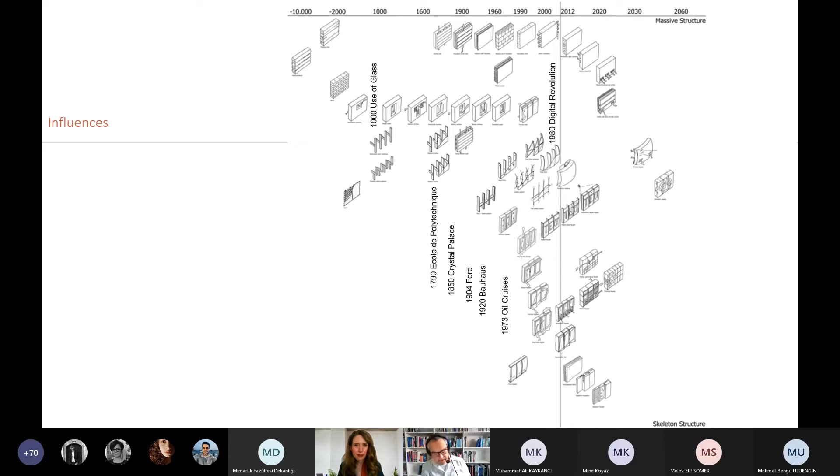And I identified some parameters from my environment, which I believe were intensive impacts on our development. So the oil crisis of 72, 73 was something which brought our Western European environment to this point: we need to do something about energy, which brought an intensive development in, for example, insulating glass facades becoming better. These aspects are interesting to see.

And then it's interesting to see that you can identify bubbles of people developing certain things. It starts with this first generation glass. It's the 1840s glass bubble, with Paxton, which we all know from Crystal Palace, as one of the people moving the, at that time, very rural structural glass engineering towards a more industrialized structural glass engineering, not really being able at that time to identify the structural performances of the material.

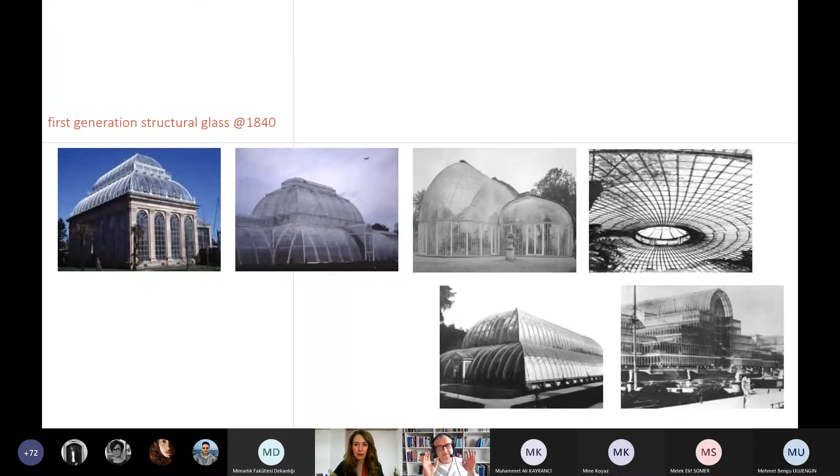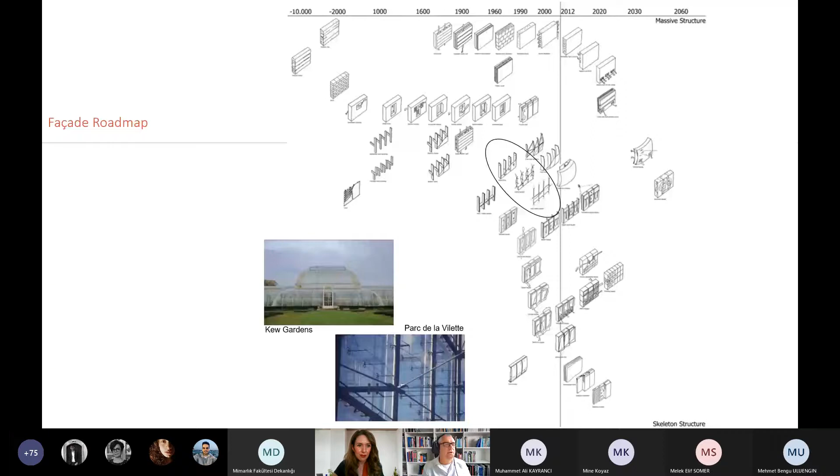Super interesting to see. When we continue with this line, I tick the next box. It's the 1980s, 1990s structural use of glass, where we see all these first large superstructures in glass, all the glass fins, first spiders developed by Peter Rice.

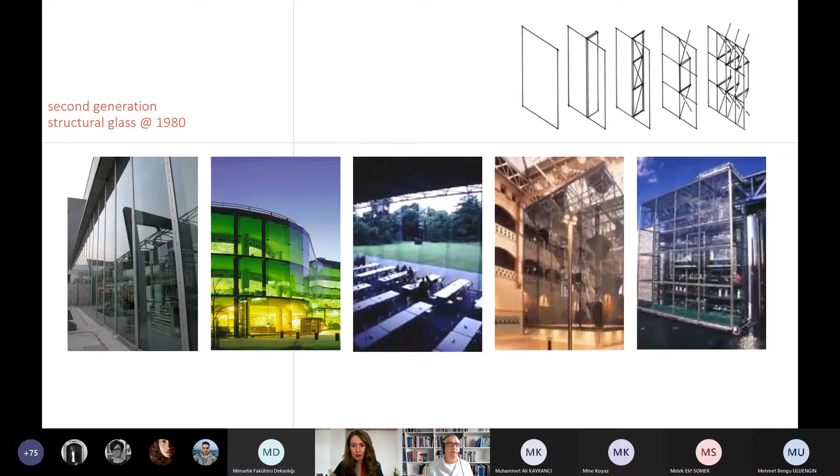1980s, which brought us to this opportunity to create large, fully transparent, as we named it at that time, fully transparent glass structures. Again, a bubble of people, and we are currently in this situation of, as I define it, a third generation of structural use of glass, where we see the Apple stores, Rob Nijsse doing his folded glass pieces.

This one piece of, say, a deformed glass structure, the second picture at the left side, or the super solid glass bricks, which are on the super right side. Again, it's a bunch of, what, 10 people engineering this worldwide, which is then widely used in architecture, but the key people really being able to engineer, that's a limited number of people.

Really interesting to see, and also to see how they interact with each other, how they even sometimes bitch with each other. And then this energy crisis, as I named it,

which gave us this impact of we need to do something with the insulation level of our glass structures, which starts with the boxed window far left as a window with 2 layers of single layered glass or non-insulated glass, IGUs, insulated glass units, developed towards all the double facades, which we then saw till, let's say, 2010 as a development,

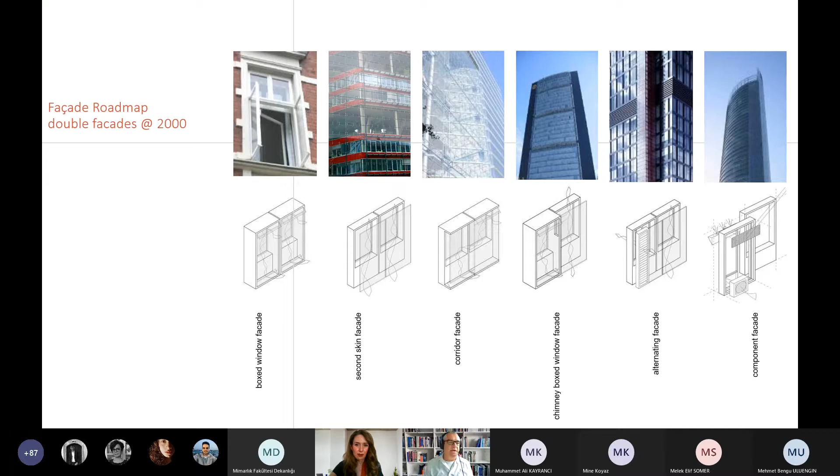and out of this understanding of the change of the building envelope, not only being the building envelope for rain protection and heat, but also becoming a part of the climate design of a building by also integrating building service units. This brought us to this next level of interaction, which is still an ongoing development of integrating service components, the HVAC system, the heating and cooling system, into the glass building envelopes.

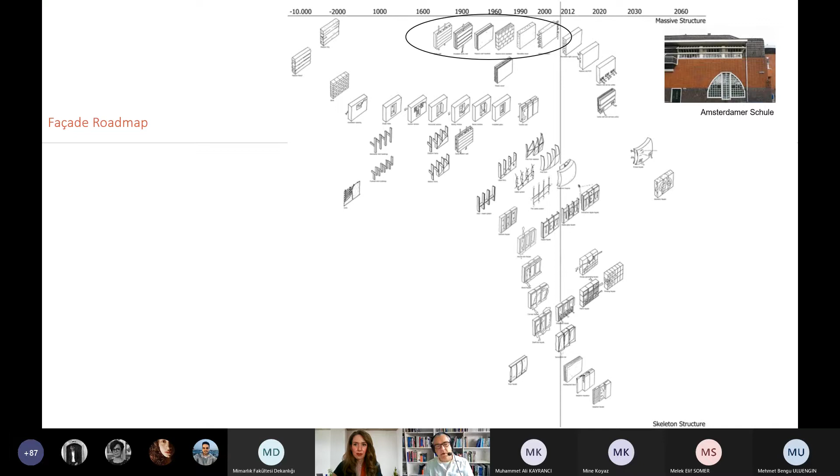And that's what this picture sketches, that some of these super high-end double glass facades are now ending with service units being integrated. This continues in more opaque structures when we sketch the technology of facades, from solid brick facades to cavity systems to load-bearing light concrete, light brick structures, adding the opportunities of service components into these, which we see in these first early sketches.

The current technology developing, in my Western European environment, is moving these opaque facades toward energy gaining facade systems. I'm going to talk more about that later in this lecture, but I wanted to make the broader picture out of this one. Again, this is a bubble of 20, 30 people really engineering it to bring it to a technical level, which now delivers a certain energy impact.

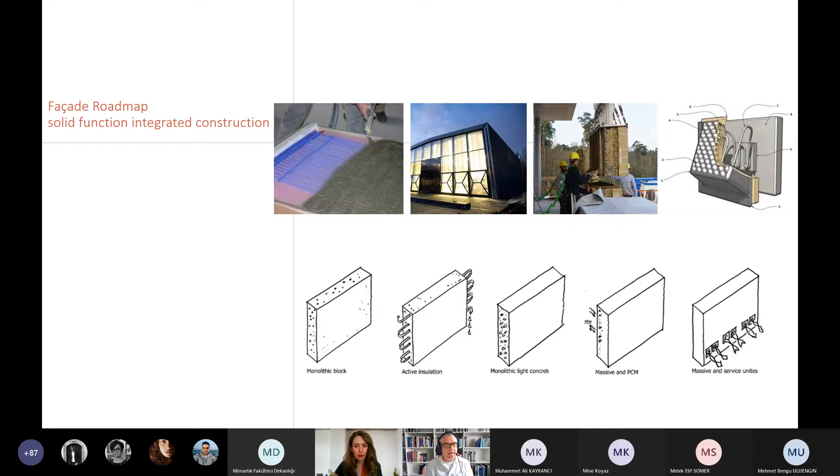That's going to be chapter 1 of this talk, and then there's chapter 2, which is about 3D printing, which is, from my point of view, super interesting as well. Again, randomly picked pictures out of my environment, expressing that there's a development which we clearly see with all the different materials which we can print: the polymers, the plastics, which we are used to, the metal, which is developing, the concrete, which we see a lot on Facebook and Instagram, the ceramic, more rarely, glass, very, very few, wood and paper, nearly none.

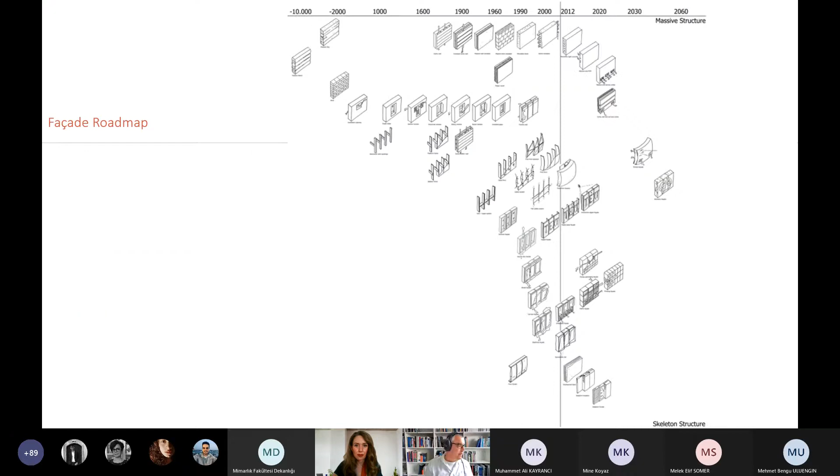And that's going to be the second chapter of this lecture, expressing the printing technologies and what we can do with that in our construction environment. So this is a roadmap to start with, and I jump to this chapter, this area of service integration into the building envelope. We are aware of light concrete being good for load bearing, but also for insulation, with the disadvantage of reducing the thermal mass, which may be an aspect to discuss.

It all started, or kind of started, with this design school project in Essen. The design school is in a university building, which was designed by Sanaa. And they collaborated with Matthias Schuler, Transsolar, a very prominent climate design company in Germany, and Holger Techen, a very prominent structural designer at Bollinger & Grohmann in Frankfurt.

And they were asked by the architect, can you please design a single concrete wall, no insulation, so kind of impossible in Western Europe, just a concrete wall, Tadao Ando like, as the quote. And the engineers started working with that and came obviously with the solution. Now we either insulate at the inside, or at the outside, or somewhere in between. But still, the concrete walls are getting larger than the 20 centimeters Sanaa expected at that time.

And at a certain point, Matthias Schuler in person came with this idea of active insulation. Active insulation in this situation means that they harvest hot water from a mining which is below this design school. It has to be said it's an old industrial area with a lot of coal mining.

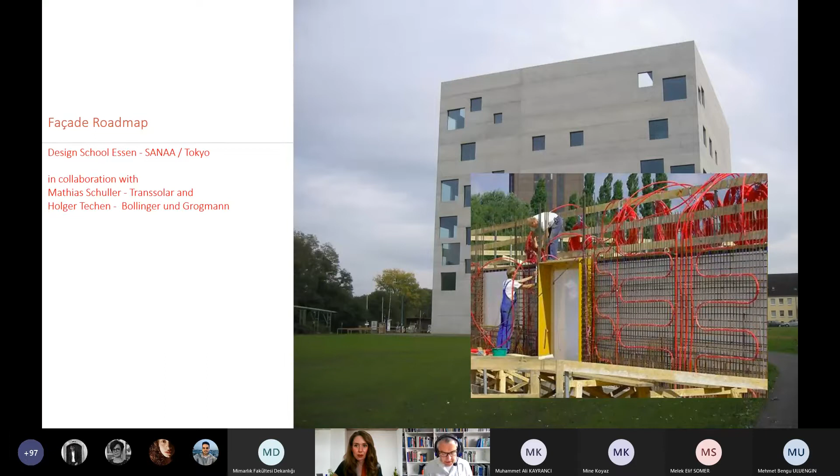Side note, yes, you can argue you could use this energy for different purposes, but in this specific situation, it was decided to use it to heat this building, this entire concrete building, and by that ending up with this super straight and super static concrete surface, which is heated by this groundwater. That's an interesting change to get this opaque structure into a building service component.

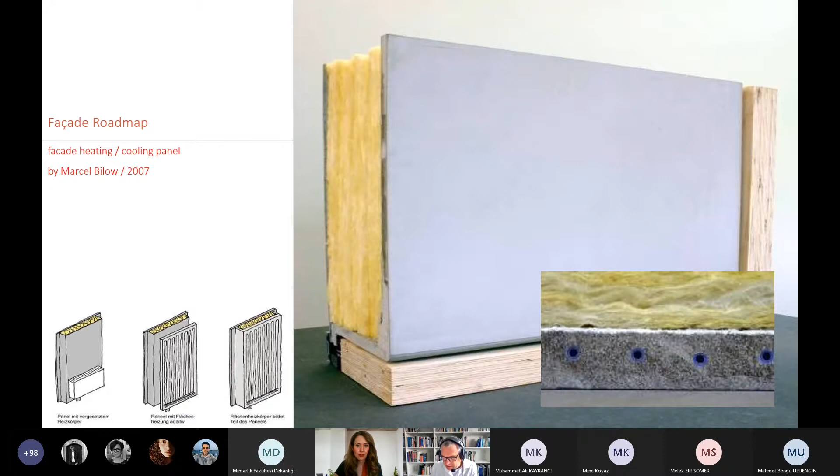This idea was taken into account when Marcel Bilow came with his master thesis, his project in 2007. So you see, it's already a development which you can see in time. He started adding these small capillary pipes, which you see on the far bottom right picture, the blue holes. These are 2 millimeter, 3 millimeter wide capillary plastic pipes being integrated, as we see it here at the top right picture, in a concrete surface, and this concrete surface then being heated or cooled depending on what you wanted to do with it.

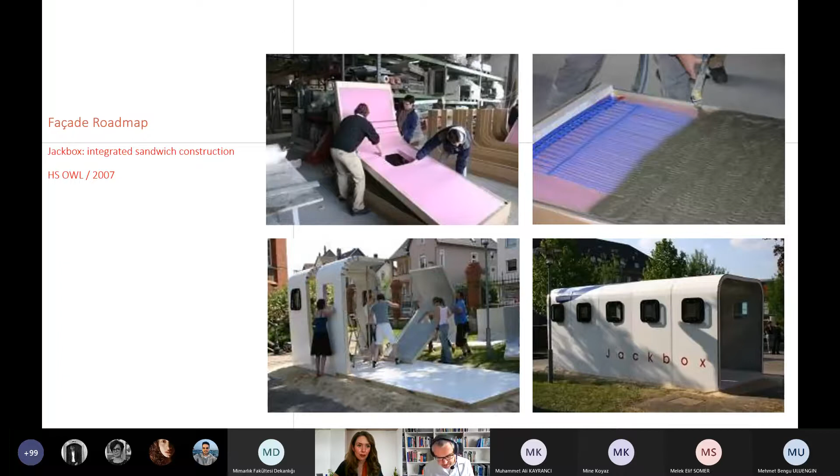This was in the second project which he did, a small pavilion which was built. It's a polystyrol form with this 2-3 centimeter thick concrete sprayed at the inside, and by that being able to either harvest or distribute hot water, cold water, by that energy to the inside of this building. This idea was taken by others. Rieder came up with a first idea of how to create a product out of it.

And we talked to other partners, and this is, for me, one of the most important buildings in this environment, because it shows how such an idea could be taken by colleagues. Again, you can link it via friends and friends and friends, talking about it and then integrating it in their designs. Jens Schneider is the character who developed this factory building. It's an experimental industry factory building at TU Darmstadt.

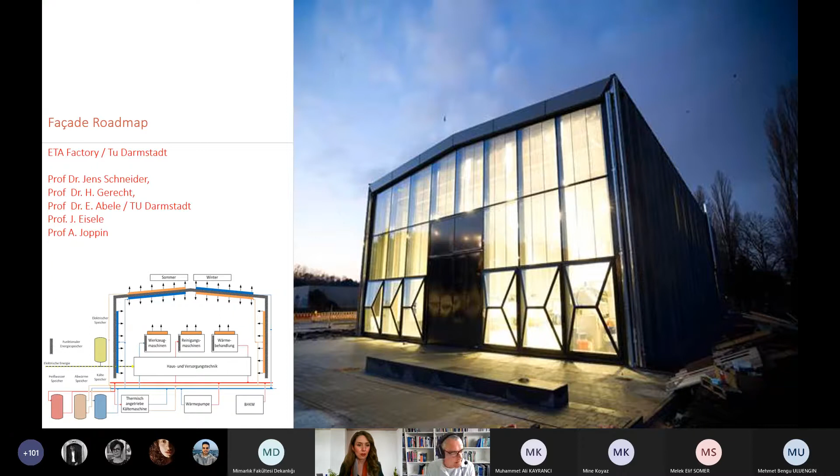And as we see on the bottom left picture, they have this heating and cooling device implemented at the inside and at the outside of the building, in the walls as well as in the roof. And by that, they are able to either harvest temperature, store it by water next to the building and then deliver it to the inside of the building in wintertime, or they're able to harvest energy in summertime at the inside of the building, store it somewhere and then deliver it to the roof, to the sky view at nighttime, which is what happens in this situation.

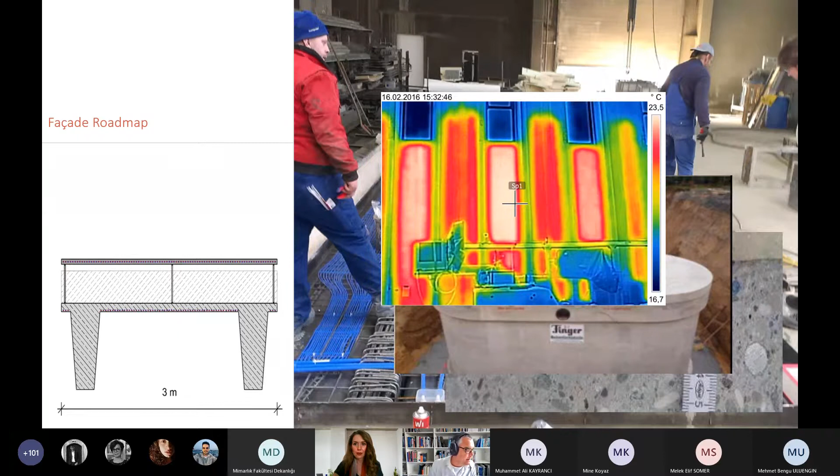And the making, similar to the projects Marcel did earlier, we see the capillary pipes, the whole thing being casted. Then we see the tanks to store the water. You can imagine the dimension which is necessary to do so. And then the delivery of temperature at the inside and the inside view as it appears when it's finished.

What I really like with this project, it's a way of not balancing winter temperature versus inside temperature or summer temperature versus inside temperature, but the average temperature of that region, 10 degrees, versus the average temperature of the inside, 20 degrees. So we don't have to heat the entire distance. We don't have to cool the entire distance. We only have to balance the energy in and out via the entire year.

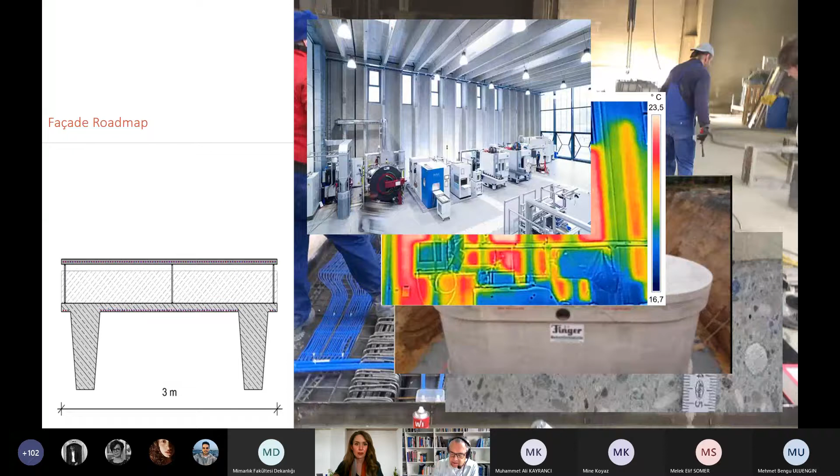There are three storage systems which are used to balance different levels and different speeds, but it really changes the way we can deal with buildings in energy terms. This idea is followed with other projects. Another project, coincidentally, in Darmstadt, where they started placing a capillary system, a heating system at the inside of this rammed earth structure.

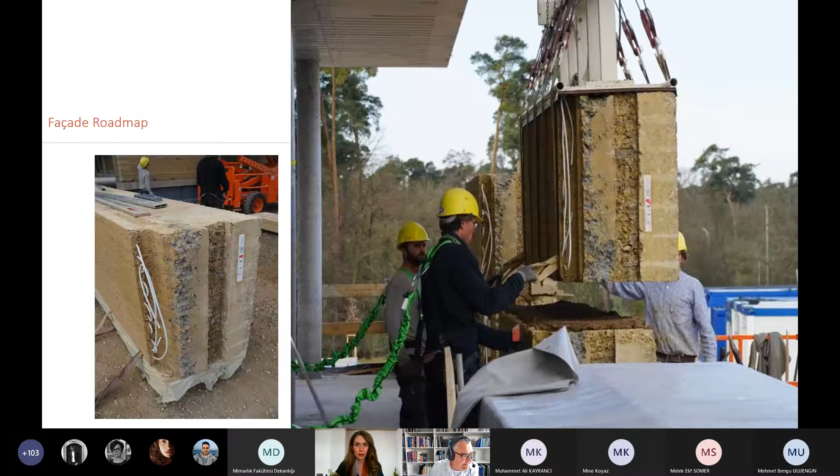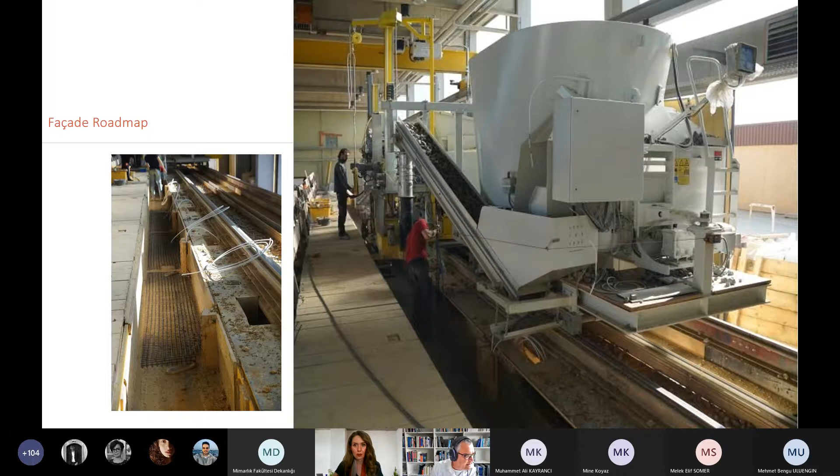It's a prefab rammed earth structure, super interesting technology to investigate as well, especially because of, say, the lower embodied energy which we need to transport these components. The final building nearly finished.

And then there's another project which I like a lot, Jason Vollen. Sinem, you will remember him. He was part of the research group who finished his idea of doing a decentralized solution of this energy harvesting device, which he ended up in his PhD with this component. We see the main section of a facade. Outside, we see the harvesting and distribution area with tiles and small copper pipes being integrated, and inside we see the heating device.

And the bottom right picture, you see that white box. That's a decentralized energy storage system, which will not overcome the year. That's too small storage, but may help to balance a day or maybe some days, maybe even a week in the system.

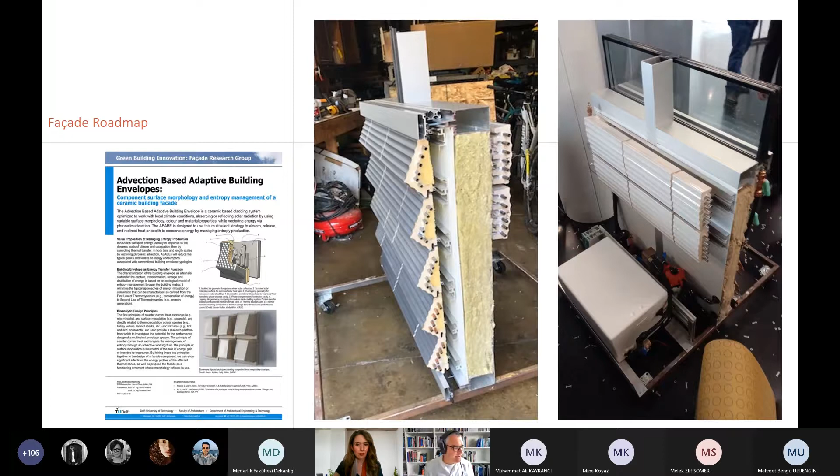So you see that there's a movement, development from the first sketch ideas with the first mock-ups towards the first industry building, proving that technology works, and then adaptation in other places of how to integrate this into designs.

This is a project which was done by a master student in Delft for India. He tried to identify climate situations and, say, main structure situation. Prefab concrete was in the end his target. And the middle large picture shows actually the inside of this piping system within this concrete. These kind of weird forms depend on what's the minimum energy to transport the water within this concrete, and what is the maximum amount of energy to be taken from these water pipes within this concrete.

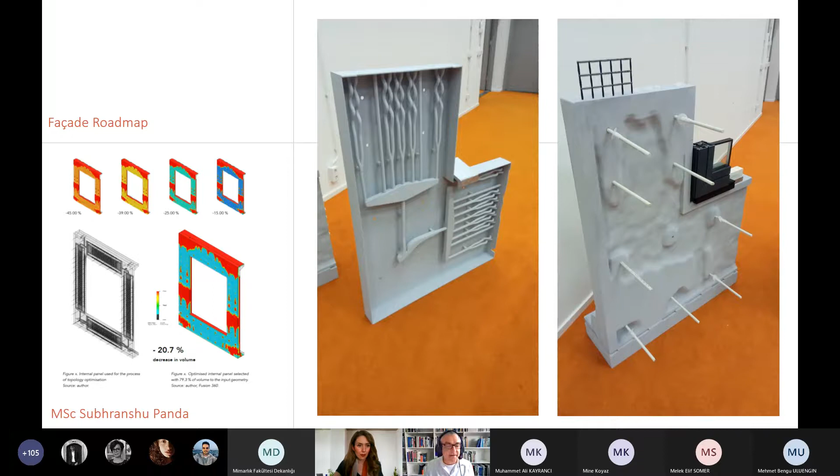And by this, this first chapter kind of stops sketching these next developments of, say, activated opaque facades. I may foresee it's either a service component being integrated into these facades, or it's, as I sketched it here, the full service energy. So this one, where we see that energy harvesting and delivery happens in this light structure as a system. We may also create virtual heavy facades in the means of material-wise having a light structure, but adding all this piping system.

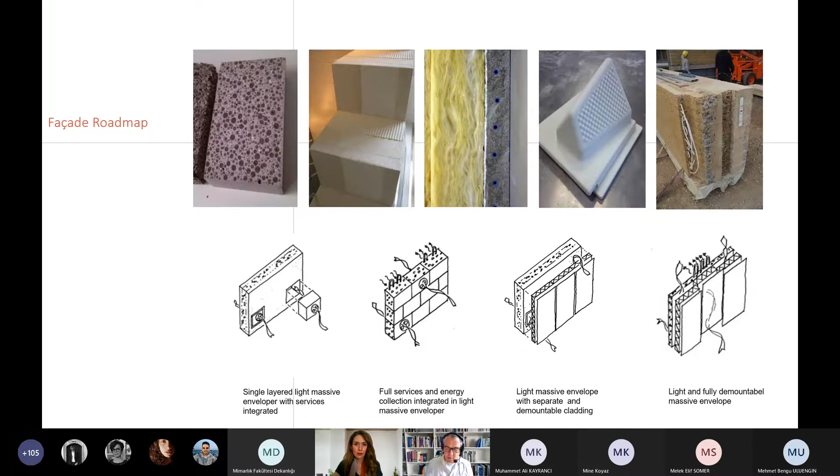We hope to bring it technically towards building physics solid structure in the means of lots of thermal mass being given by the water being integrated into these systems. This is chapter 1, and as I started with these roadmaps, you can imagine then you continue with the roadmap. You end up in a roadmap for the structural or more solid structures.

So you see all the different types of facades, which then end up in the just sketched layout opportunities to develop new, broader active facade systems. This is not about aesthetics. It's about, say, functionality of certain components which can be brought into products, which then by aesthetic can be integrated into the design. It's more energy harvesting and distribution driven than aesthetic in this chapter.

All right, this is chapter 1, and if okay, I jump to chapter 2, which is the 3D printing field. 3D printing came to us again via Marcel Bilow, a PhD who was active in that field. And depending on which literature you read, you find 6, 7, 8, 15 different types of 3D printing. But mainly, you can divide it in 2 ways.

So it's the extrusion way, which means you somehow press something out of a nozzle, and this nozzle is robotically controlled to create a certain geometry. And whatever you press needs to be either liquid or melted and then liquid and then hardened in a certain environment. That's what you easily can do with polymers, plastic, and with concrete and clay. We're going to see some pictures later.

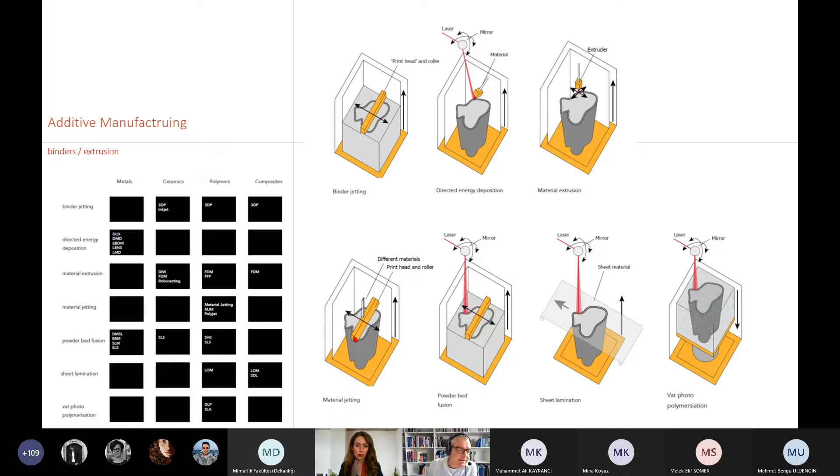If you want to be more precise in surface quality, the binder jetting strategies are more feasible to follow. That means that you place a powder, you place an energy source, melt the powder, or freeze the powder by water, for example. Then you place another layer of the powder, do the same, another layer, and by that create a geometry, which is then in this powder bed, and then the powder needs to be taken away, and by that you get the final result. These are 2 main principles of how we create 3D printing systems. This is one of the early 3D printing parts which I was aware of, far right.

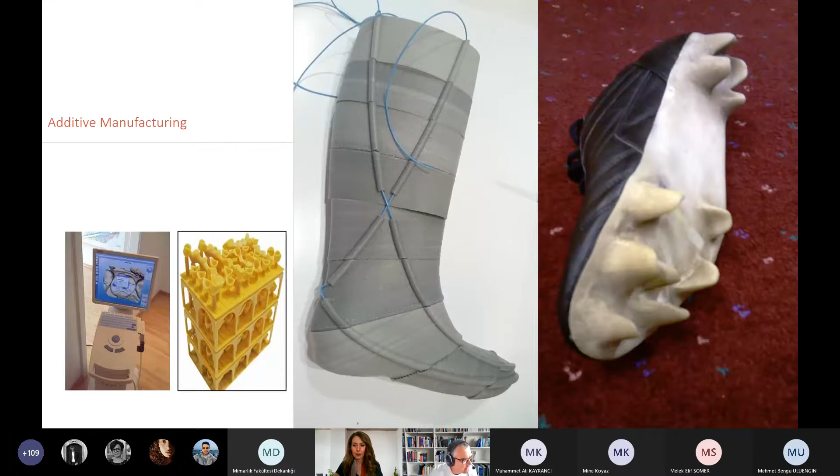I always use this picture, which is a robot hand, and you see the white valves where air pressure is put in, and by putting in air pressure, this robot hand starts to move. So it really grabs your hand and really can feel it. And if you start pressing more intensively, the air pressure gets higher and it starts to press back again.

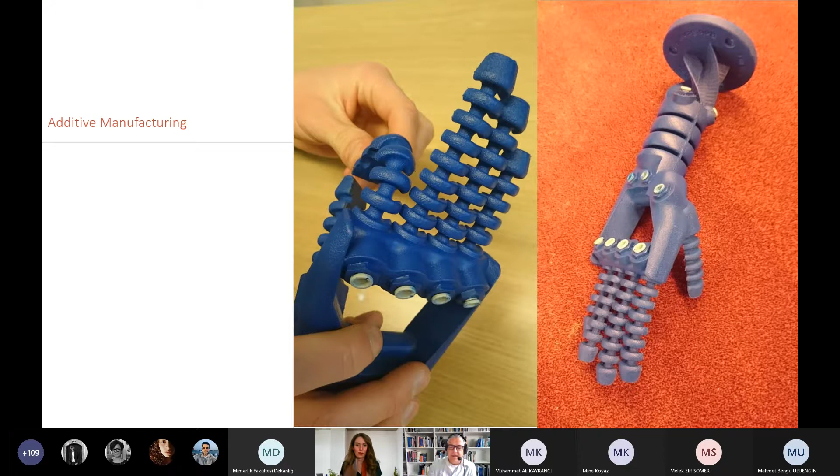Why I like it is because you're all aware of how such a robot hand would look when you really engineer it with all the springs and wires and screws and metal sheets. And here it's printed in one go, in polyurethane if I remember right. So it's a lot simpler to develop something like this in one piece, which then is manufactured as one component. That's the interesting thing with 3D printing.

I like these chairs, very early chairs from Marco Hemmerling, somewhere around 2010. The middle one is a one-to-one structure of a 3D printed force-optimized chair for a person to sit. The far left one was a print which was then transported in a container and overheated. It directly expresses the problem which we have with polymers being printed. If they get too hot, they start to melt.

And the far right one is an interesting one. It's a so-called Tango Material. It's a printing process which allows you to print either soft or stiff material, different materials, in one process. And by that you can create this structure as it is designed here. It's the same chair as the middle one, but it shows that the place you sit and the place you lean, the black part, is softer. So it allows you to shape to the body, while the rest of the structure is more solid, and by that withstands loads a bit more.

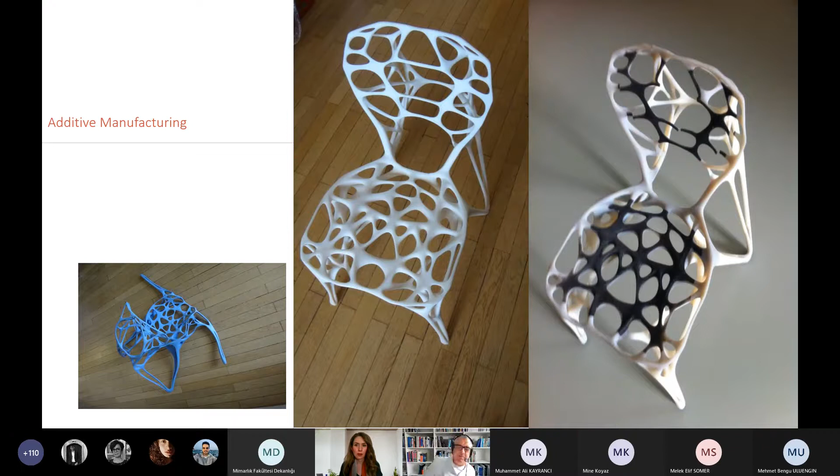Then the tricky part is that the far right picture is a 1:5 or 1:10 scale, while the middle picture is a 1:1 scale. So it directly shows that the dimension of the printing space is super important for these designs. And then I go to this slide. It shows one of the early developments in 3D printing.

DUS Architects, Dutch colleagues, wanted to print a Grachtenhuis, a house in Amsterdam close to a canal, and they wanted to print it entirely in plastic. And he was able to convince all these leaders at that time that 3D printing could become important. He was doing it in polymers, which are not good for structural use, so fire and UV become a problem. So in the end, it didn't work as they expected, but they prepared the ground for us to continue these technologies.

It goes on with this Gartner hype chart. The top part of the wave shows the technologies which are emerging. This is what we all think is going to be super fancy. And this is then the valley of disillusionment or disappointment. This is where technology shows that things are not always simple.

And it's super noisy. I have to close the door. Just a minute.

Back again. So the concept starts here. We have a good idea. We believe something is going to work. Then we really start digging in, and you're going to see samples of that. And we learn things are getting complex. And after some years, you really end up with products. We're going to see some products here as well. And the interesting thing is, from experience, from the top point until you really get to a product, it's a range of about 10 years.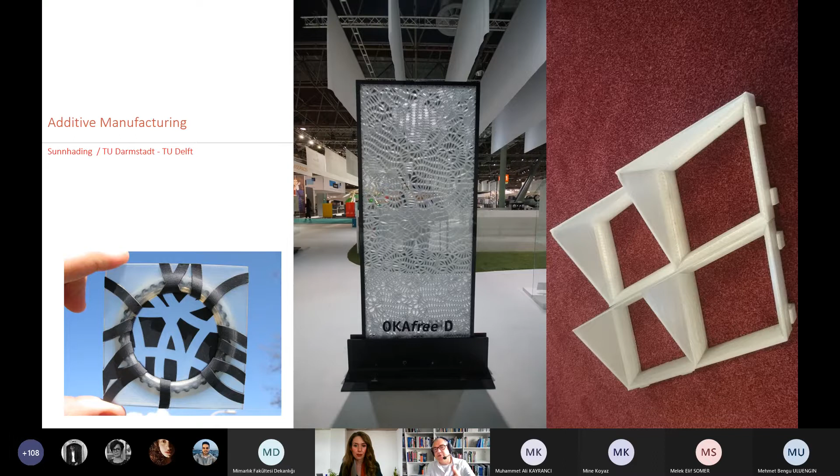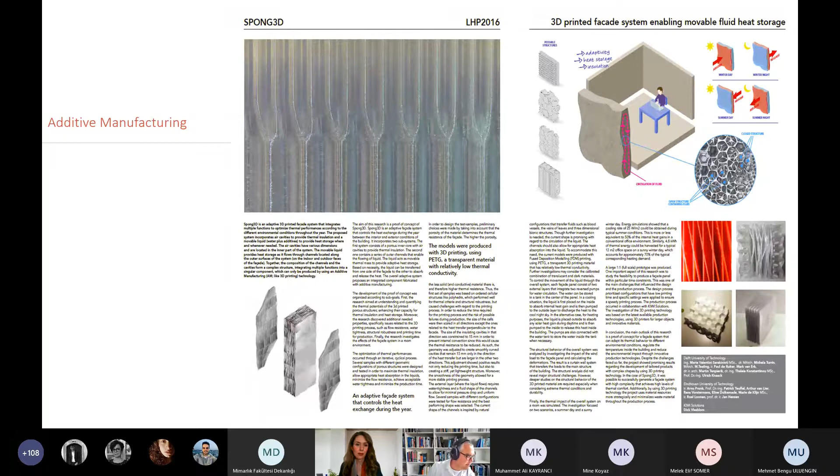UV becomes a problem, which brought us to this OKAfree D project, which is an IGU, insulated glass unit, with some three-dimensional printed structure, which is designed to be perfectly oriented to shade for the situation this glass panel is placed. This continues with the solar thermal harvesting idea. You remember the energy harvesting I showed earlier. These are 3D printed, polymer 3D printed bricks, which are supposed to be harvesting devices for solar thermal energy outside.

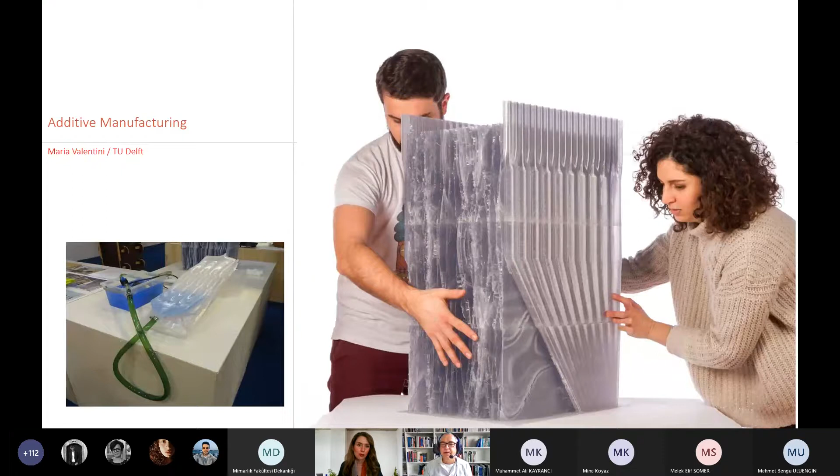And that's another experience which you make with this printing. They printed bricks. The bricks need to be connected. That was kind of impossible, so they started to develop their own printer, which in the end was able to print 2-3 meter high components. But you see the dimension of these volumes which are printed, and then production speed becomes a problem. They in the end needed 10 days to get one of these components printed. Yes, this is pre-industrial research, so if you really need to get forward to that, you may end up in more high-speed oriented production processes.

Brings me to concrete. This is contour crafting. Colleague Khoshnevis from Los Angeles, some 20 years ago, started developing this. It's actually an extrusion process, which we see in this middle picture. It's an extrusion process of concrete. You just print the concrete out of a nozzle and place it. He is the one who developed this as an idea. If you go to YouTube and Google contour crafting, super nice videos to see.

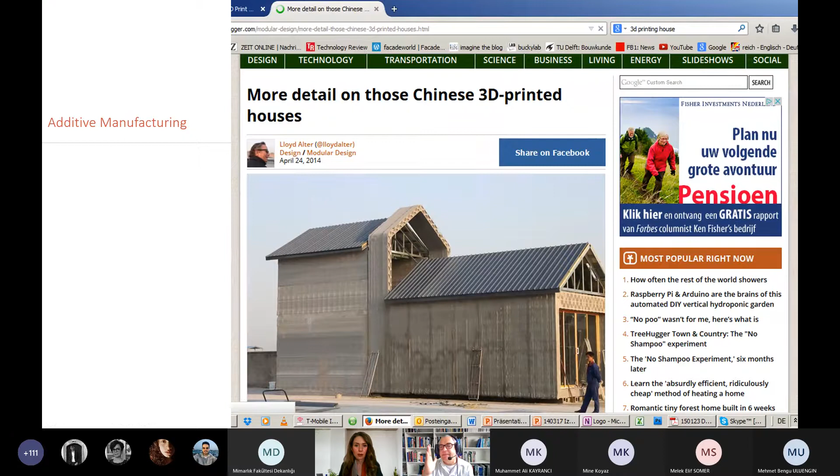It didn't work out at that time. Industry wasn't ready, market wasn't ready. He talked to Caterpillar, they laughed at him, and at a certain point he stopped. Some 10, 15 years later, this happened somewhere in the media. A Chinese company took these ideas, started to develop it, and actually printed prefab components. So what we see here is a prefab component, which they printed horizontal and then stacked. And that was the point when things changed, then others identified this is something interesting, which brought these two players into the picture. And the top one is going to be important for the next slides as well.

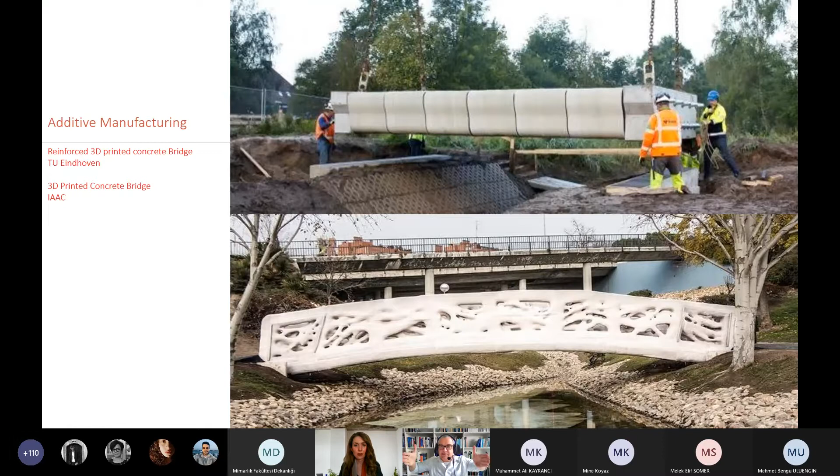It's TU Eindhoven, which came with the first 3D printed bridge. And it's actually, again, horizontal printed, then vertical installed units, another unit, then pre-stressed. So it's like a stack of books, which you pre-stress by power and then are able to place it in a certain position to allow loads to get on top of it. They have a nice device, which we see here on the far left side, size of people. This is the printing room. So the size is less an issue. They have this Portalkran system, which allows them to move the nozzle in position. It does not allow to tilt. That was a problem. And then they started printing all these different layers.

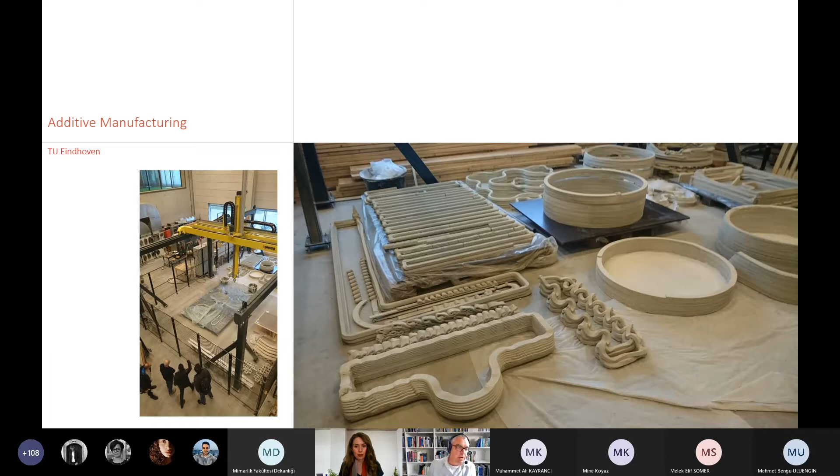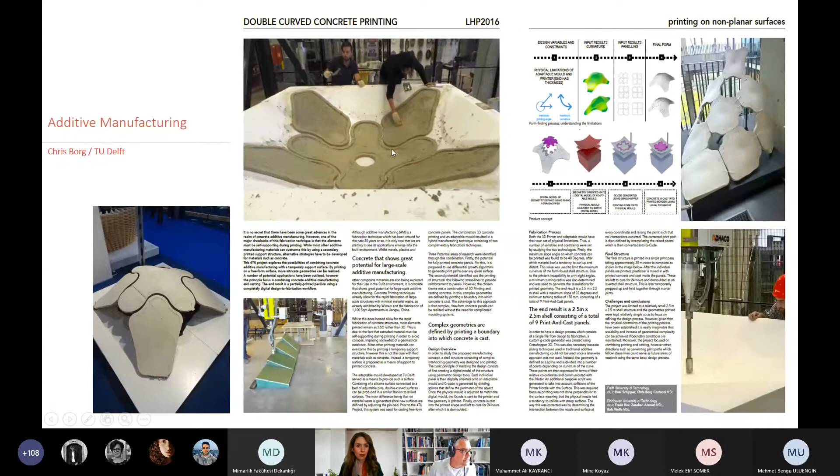And we learned a lot about how to control the dimension of the extruded concrete. Because if it's just round, it's maybe simple. But if you start to do edges, curves, this may become more complex. Tilting concrete, that's something which gets more complex as well. This technology developed a lot. There's one small sample which was done in my environment, this turtle. Chris Borg learned how to use that nozzle in Eindhoven to create these forms, these free forms. Super interesting research.

And this is the current status of 3D printing. ETH Zurich is doing a lot in this environment. Then this is TU Braunschweig in Germany. They spray concrete with this robot-controlled system, and this is Peri, a mold system supplier, who understood that 3D printing could be an interesting field for them. And this is where we are. We're currently at a number of universities, a number of research institutes being active in 3D printing, really bringing it to the next level.

Still, the reinforcement in this 3D printed concrete is an issue, because we may add small steel fiber to the concrete, but still larger components are difficult to handle, and tensile stress forces in concrete are not that simple as a problem. This continued with this one, which I like very much as well.

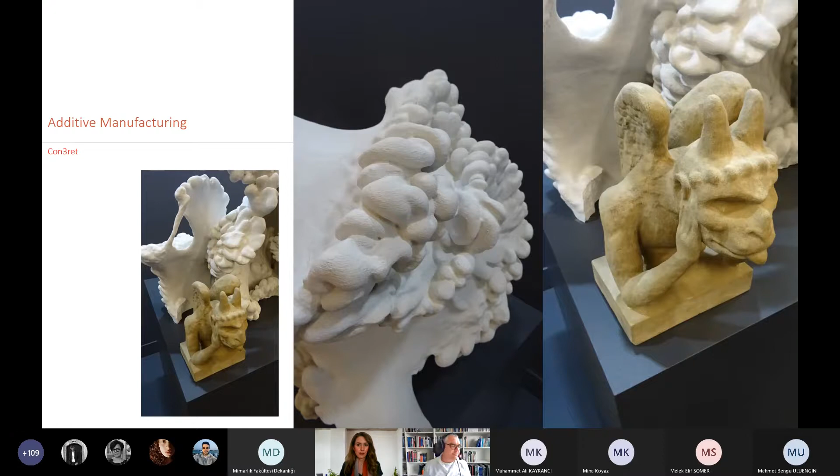It's Con3ret, a spin-off from TU Delft in Rotterdam, and as the cathedral in Paris was burning down, they said instead of rebuilding something out of the original material, why don't we take the dust and combine it with cement and reprint certain components, which is, say, in the beginning of a nice story. It may technically have some issues, but it shows the opportunity, the free-form opportunity these materials may deliver.

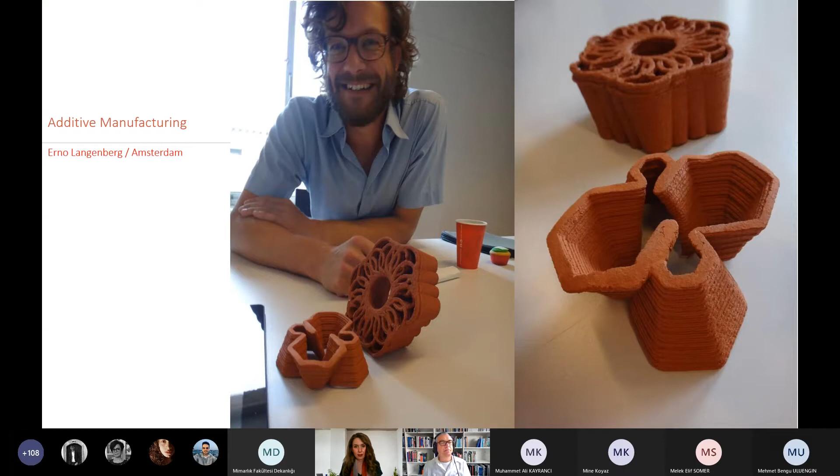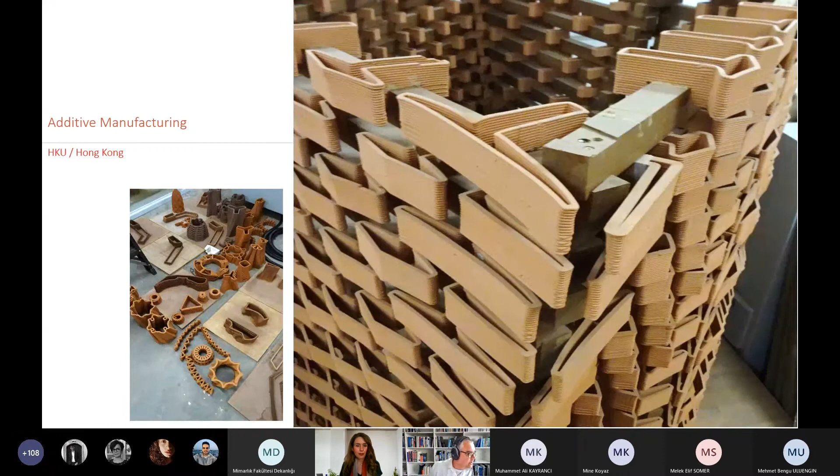I move forward to the next material, which is bricks. Langenberg, an artist from the Netherlands, once came to me with these small components, and then understood what the potential of 3D printing clay and brick could be. He started with this more art-oriented object. I found other colleagues, Sita in Copenhagen, doing this. I found another colleague in Hong Kong starting to do these free-form components. Friends in Guimarães in Portugal started to use the same 3D printer we bought, and we bought this small device. It's a portal crane system, which then was our first 3D printer for bricks.

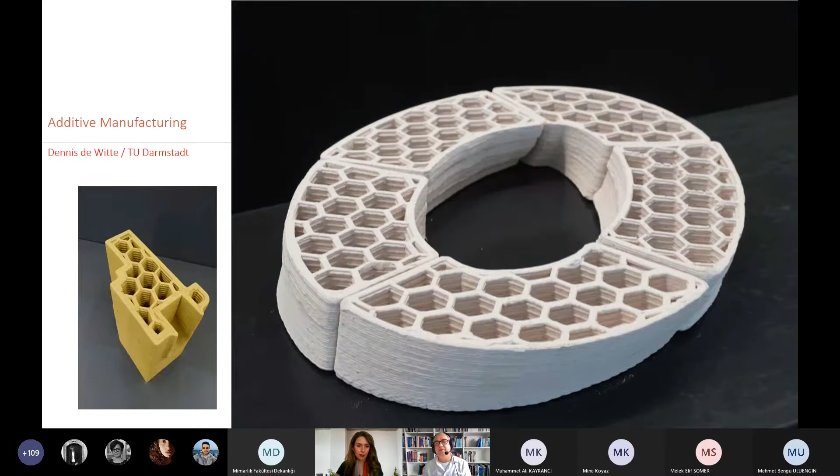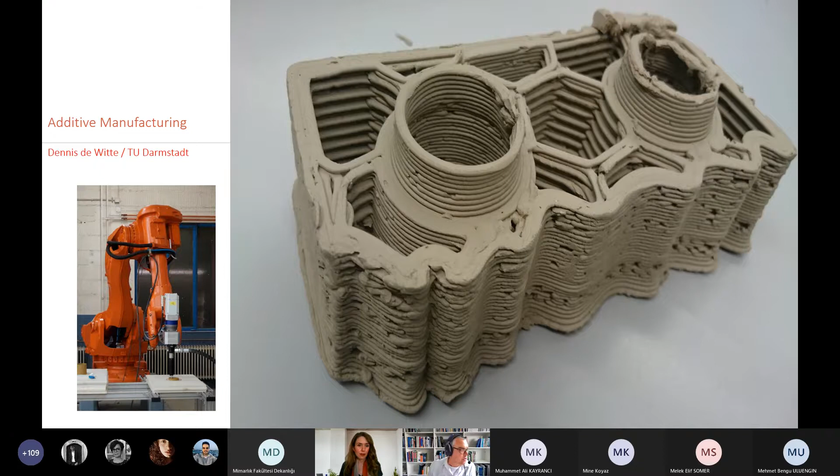We continued shaping the geometry, and you can imagine in the normal production processes, bricks are extruded. So it's this extrusion process which has one shape, and you can only change the length of the component. You can't change the geometry of the component. And by 3D printing, you may be able to really come to entirely wild shapes like this one, impossible to be extruded as a system. We changed towards a typical robot arm driven device, which we see on the left side, and we're currently running, I think, 3 of these devices on the 3D printing of bricks.

What do I want to reach? This, I'd like to create a brick which has the geometry which I want. The surface I'd like to get quite aesthetic. The technical performance integrated like this solar radiation and solar heating devices, some thermal insulation, which means it has to be light in a certain area, and some solid parts which would be load bearing. This is a gypsum brick sketch idea from Dennis de Witte, who started developing it towards these bricks, and give it another 2 or 3 PhDs and we're going to be there. It's going to be interesting.

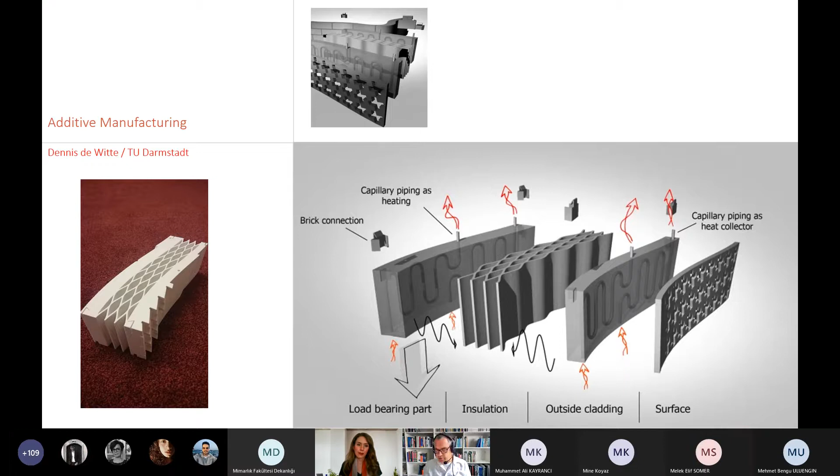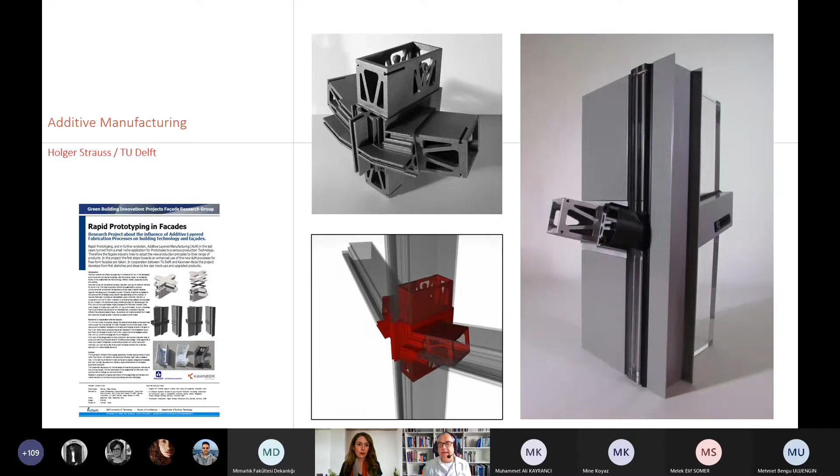I move forward to the next type of material, which is metal. In this case, aluminium, laser sintered aluminium. So this powder bed system, a powder bed where you then with the laser position and melt the metal powder towards a solid piece of metal, which in this first project was the idea to create a free-form geometry component. We'll see that later again. This is one of these components which was then by Alcoa, a company at that time interested in this activity, brought into this free-form facade stick system.

When you have a stick system, rectangular stick system, and you want some kind of wild angles, the dimension of the saw defines how wild this angle could be. And if you really get 3-dimensional, then it really gets complicated. The alternative is you cut it rectangular and print the knot as a component. So then this one knot solves these problems, which is a geometry problem, and B, more technically speaking, for the facades, the water drainage question within this system. Others continue with this idea as well.

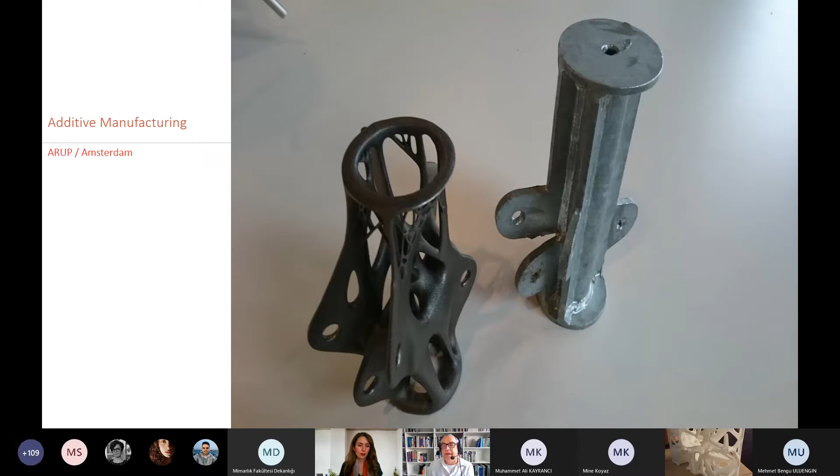Arup Amsterdam, she was the first printing this free-form structure. This is a pre-stressed tension compression structure, tensegrity structure, where either the right side would have a simple metal part, or the left more advanced and lighter by its construction. We did some engineering and design development in Delft. This is the first metal node which was done in Delft. It's part of this free-form geometry.

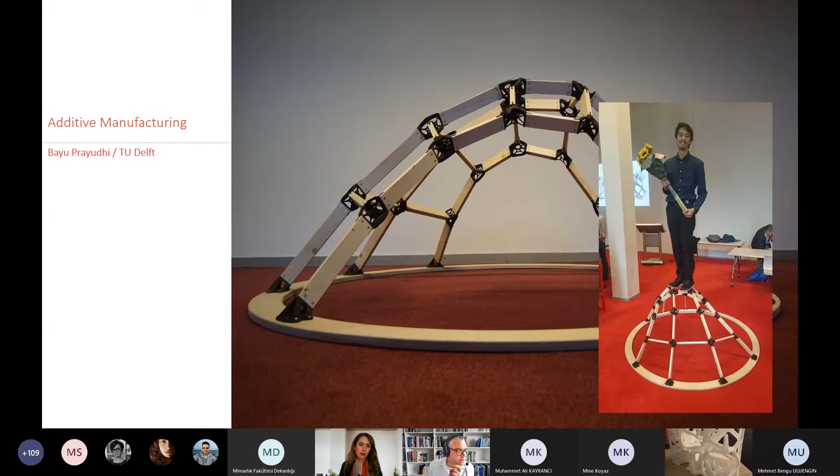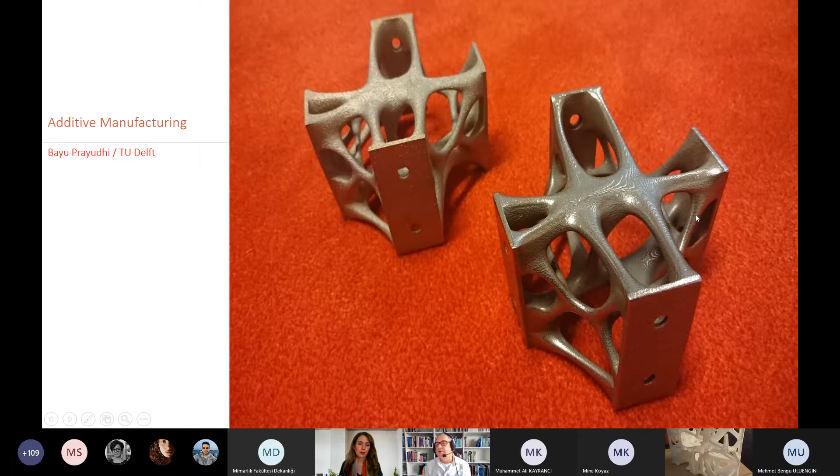The student needed to stand on top of it, and when we look at it, we nicely see how this powder bed system works. You see there's this one layer of powder bed, then it's melted, then there's the next layer of powder bed, and the next and the next, and by that this geometry appears.

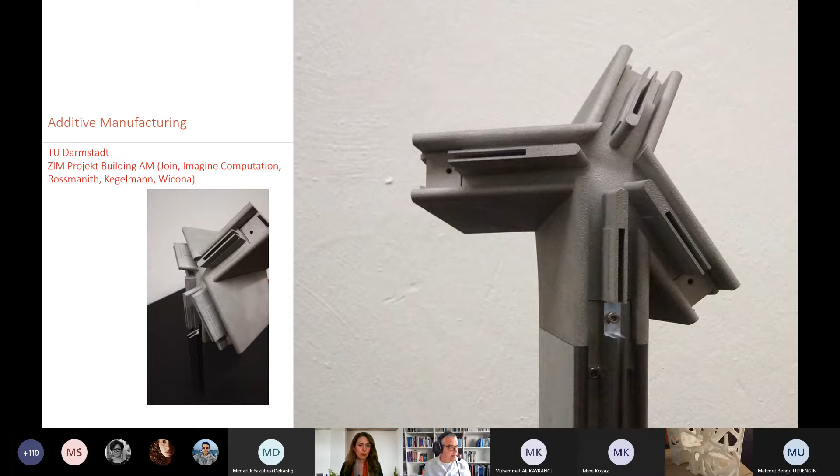Another one, a PhD in Darmstadt, who continued with that one, and in the end developed this free-form facade system as a product which is now available with some companies named here, Imagine Computation, Rossmanith, Kegelmann, and Wicona as a system supplier to be used in facade construction. So after the first PhD, some 6-7 slides back till now, this is a range of 6-8 years till we come to the point that we are able to deliver something into the market.

It continues with a stainless steel version of the same concept, ODS Jansen, ODS in the Netherlands, Jansen in Switzerland, which are following this line and creating a free-form knot for their stainless steel system. Some other disadvantages in the means of drainage and leakage, so a different setup, which needs to be developed.

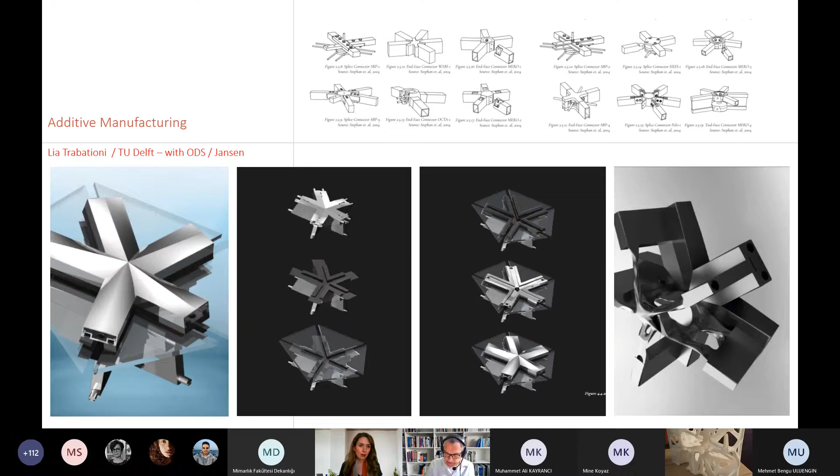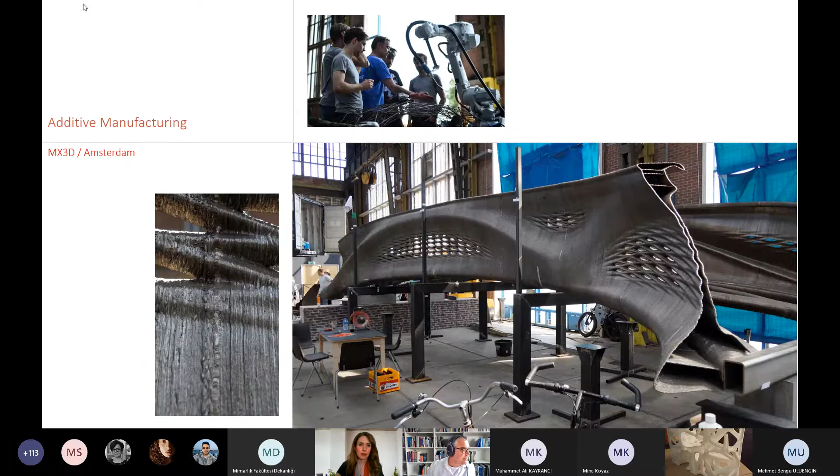They started with this idea of really making a three-dimensional geometry, and currently are in the finishing process of this 3D welded bridge to be installed in Amsterdam on top of one of these grachts. Super nice design, and it's interesting to see also aesthetically what this technology delivers.

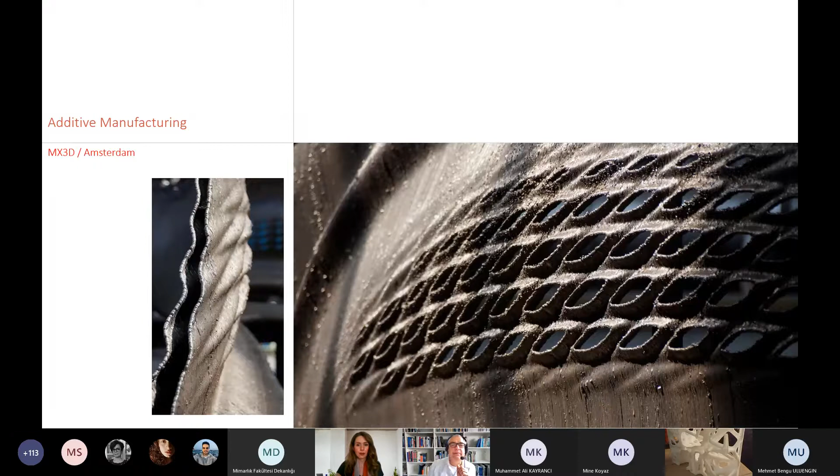So you see how this welding process opens and stops and creates these voids and allows to really shape this geometry according to your technical needs, if you want that, or your aesthetical needs if you're interested in that one. Really like the way they deal with this as artists / engineers.

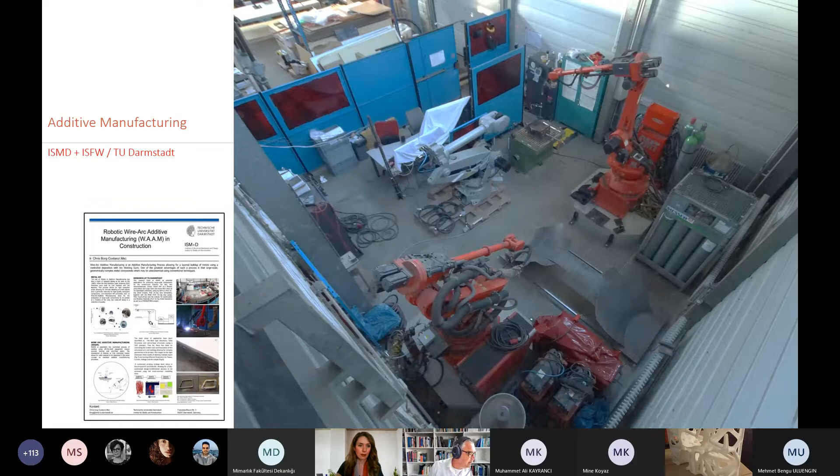So you easily can combine these structures according to your technical and aesthetical requirements, following the technology and allowing to have this certain appearance as an outer geometry.

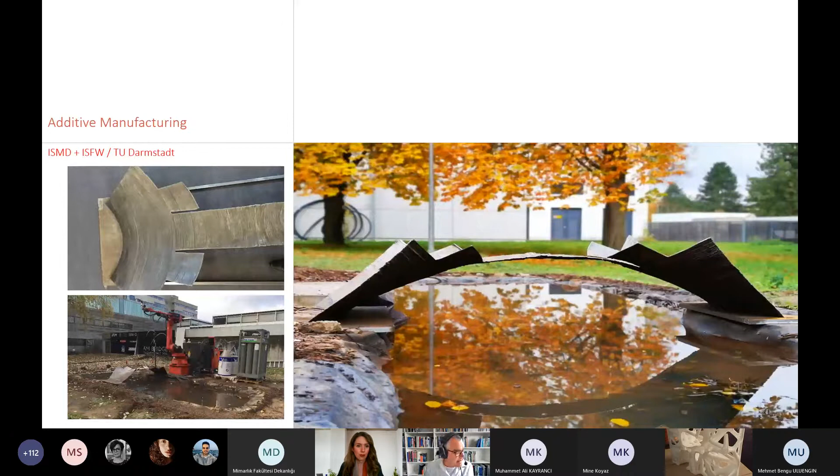A project we did was this small bridge. The interesting part in here was the bridge was not done vertical as components and then welded together and installed, but entirely horizontal. So the welding gun was trained to do a welding process which allows to have a horizontal welding line. That was a tricky one. They found a good way to do that, and by that ended up in this nice little object to be shown.

in that way that they are fitting at exactly one place, and you don't need to adjust any of this, which makes it interesting for the steel manufacturer or for the facade manufacturer to build something without any tolerances directly in the first shot as a setup. I really like it as a principal concept.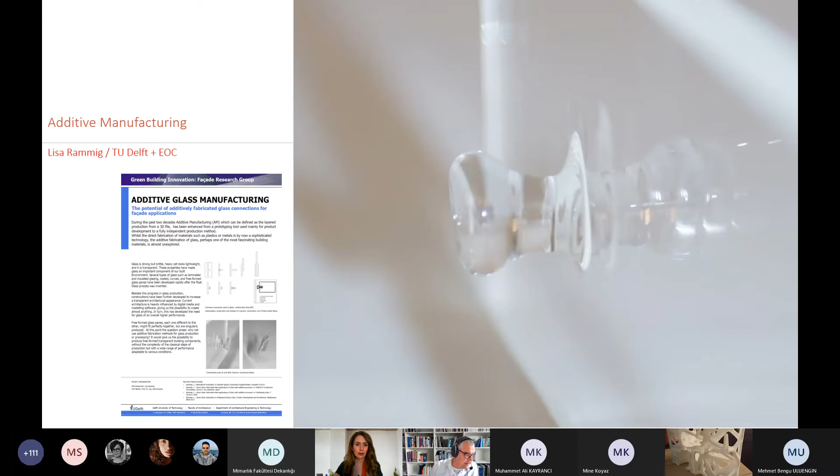A lot of thermal stress appears in that. So it's interesting to handle, let's say it so. This is only glass on top of glass, so there's less thermal stress which needs to be handled, but they were the ones which created the largest device to do so. Another company doing something similar, QSIL, a Dutch company, doing it on a more nano scale.

And then engineers in Darmstadt continued investigating what really happens when you weld glass on top of glass. And here again, you see my mouse, there's a small void, which obviously from the structure point of view for the glass is something which you'd like to avoid as a conclusion.

What we want to reach is this kind of systems, top part, fixing devices to keep glass in position, bottom part, readjustments or reinforcement of glass as a general structural layout, which then, as you can imagine by these pictures, also can start becoming an aesthetic component.

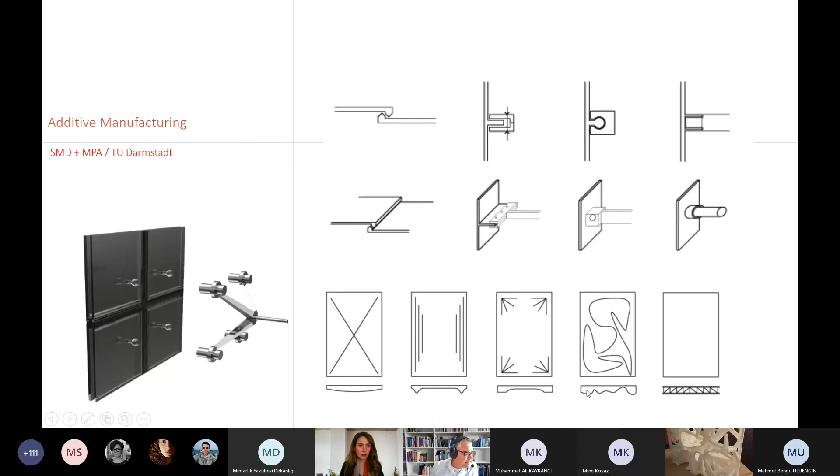When I go to polymers, we continue with this one. This is interesting. The large picture, that's Stratasys. They do a nice Tango-like material. So they have either rigid parts, which are the white parts, or different Shore values, so weaknesses of the structure, which are the black parts. This is basalt fiber reinforced plastic. So it's actually reinforcing like concrete, but in plastic. That's also something which could be an interesting solution.

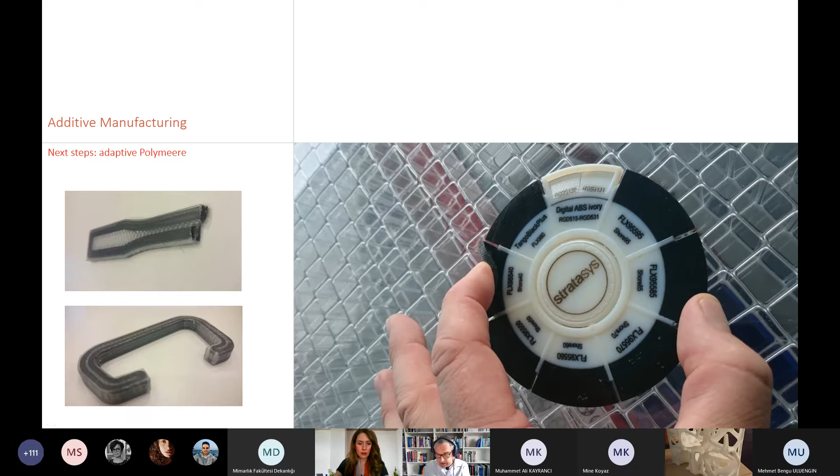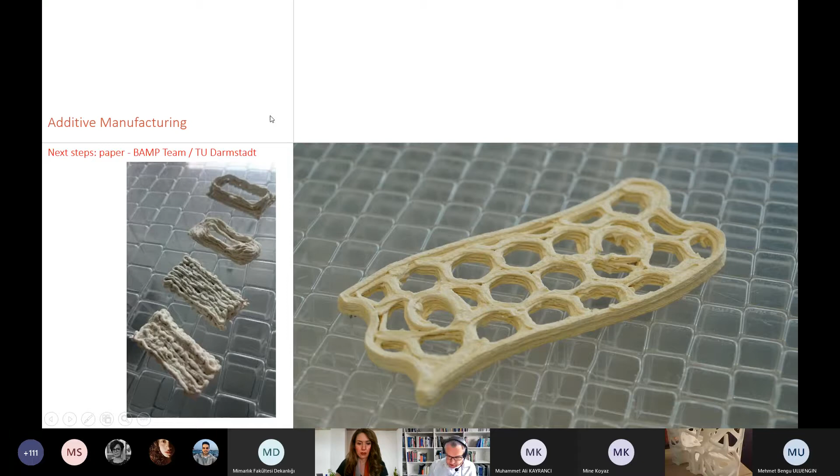And then we come to the next one, which is printing paper. These are the first 3D printed paper parts done by a PhD in Darmstadt, which currently is quite good in position to create the three-dimensional printed geometry of these paper structures. You have the liquid paper pulp, which needs to be extruded. It has to be dried in a certain quality, and you need to make sure that the shrinkage ends in a setup which you're really able to control.

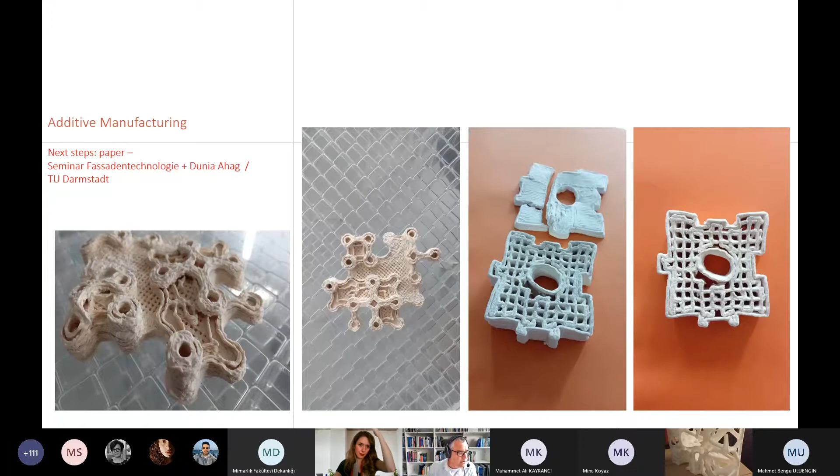Continuing with this, obviously wood is something which was missing. And here I'm talking about real wood, so not wood fibers being combined with 60% polymers glue, but pure wood being made liquid, so separating the lignin and the wood, getting the whole thing liquid, and then combining it to become a piece of wood.

Yes, we have aesthetically not yet any idea of how to solve that it really appears like wood, and yes, we don't have yet a technical solution, a technical request for this material to be used. But I wanted to browse through all the materials which are, say, in general possible to be printed.

I continue with some general outlines about 3D printing. So why do I do this? When I do my typical building technology education, the target is to teach about how you make certain things. And the consequence of making things is you need to be able to assemble it, and being able to assemble it defines dimensions in structures. And these dimensions are given.

When we think about 3D printing, we can design something not construction oriented, so how to get it together, but function oriented. What does it need to perform? So where do I need which material for what purpose? And then I can theoretically define how this material is to be placed.

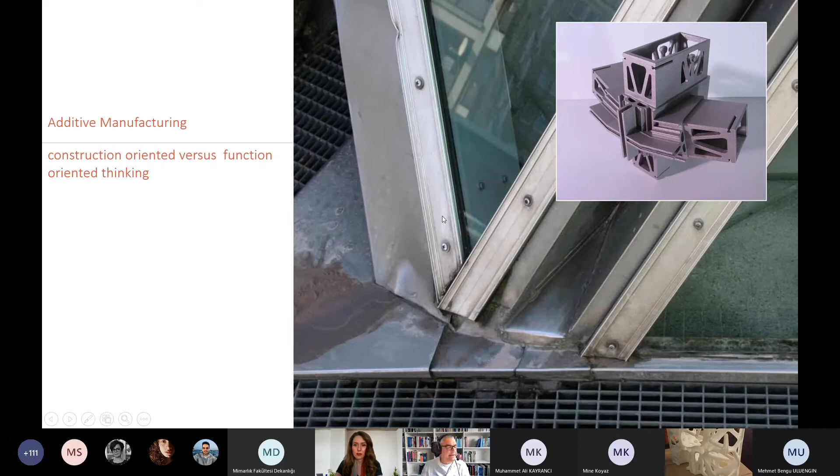I take this bottom right picture, which is a three-dimensional stick system. And you can see by being sealed with silicone, super prominent architects, super bad detail. By being sealed with silicone, this is obviously going to leak. There's no way of not having this leaking. So this is construction oriented, but they wanted this geometry. To make it better, you need to create a different geometry here, which may end up in this kind of freeform structures as a first setup.

Then second thing, and that's something which I think is also very interesting for our industry. It's a very fragmented industry with very, say, small suppliers of systems. The larger system suppliers for facade systems in Europe have the dimension of a small car industry supplier in Europe. So they're rather small, and all manufacturing is done in smaller industries, mainly in close distance to the construction environment, and that delivers that we are dealing with a very fragmented industry.

That's the one part, and the second part, we are dealing with a construction environment which requests one-off solutions all the time. And this is where this nice gentleman, Neil Hopkinson, comes into the picture. He draws this sketch saying, if you're ending up with products less than 10,000 in industry, additive manufacturing may become interesting. This is very broad. Different materials do have different numbers, but you can imagine that in our construction industry, we're not always dealing with 10,000 or 1,000 of the same components. We need them individualized, and this is where 3D printing is an opportunity to be used as well.

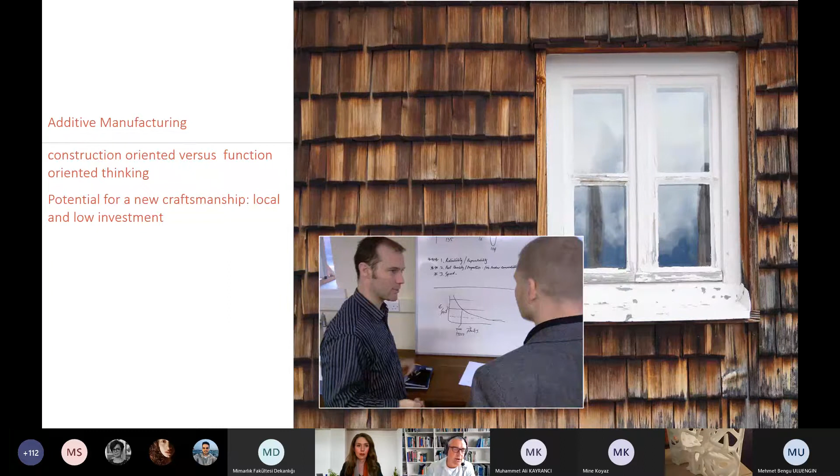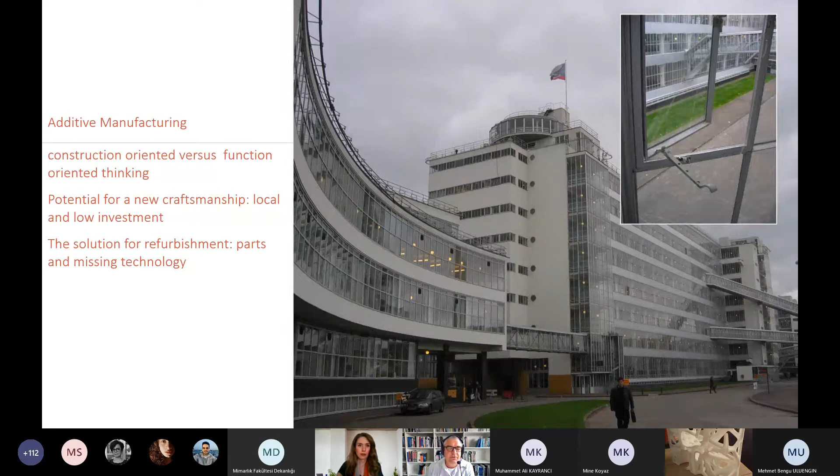Then this one, solutions for refurbishment, components which you can't buy anymore because they're out of stock. They're not in the shelves anymore. They're not produced because the company went bust, disappeared, whatever. Replacing this kind of components could also be an interesting way of doing certain things. And then this one, which means additional functionality, integrated technologies. It may be energy harvesting as a solution, but also other technologies.

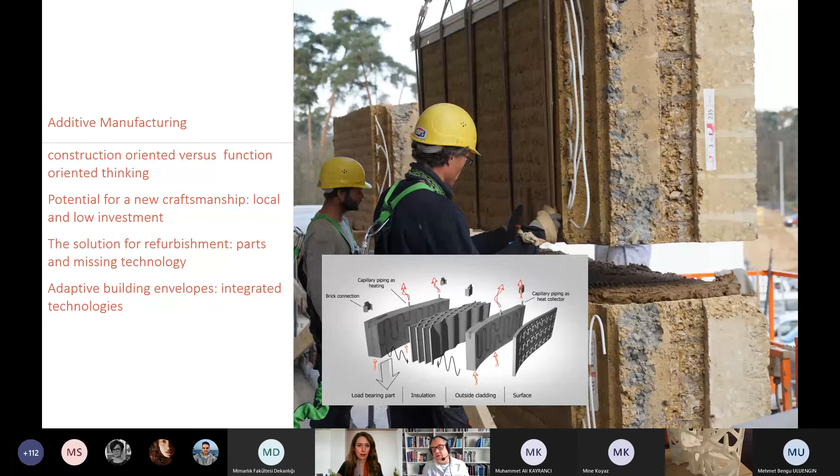We scanned the surface and we reprinted a part to express how it looked at that time, which you can imagine making broader, more advanced, bringing it to the next level, meaning that you can mimic a certain place at a different place. So if Venice is dying, we may reprint Venice next to it and keep the old one existing.

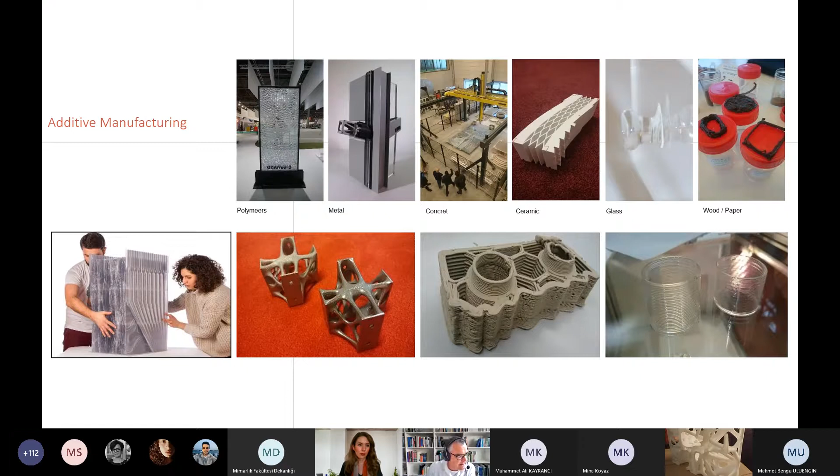Closing this chapter with this slide which I showed, all the different materials which we use: polymer, metal, concrete, ceramic, glass, wood, paper, and the roadmap where this is all to be placed.